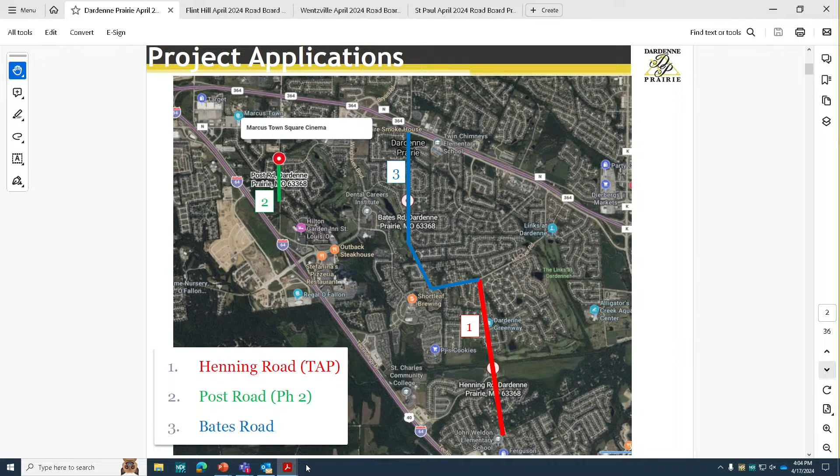So, City of Dardenne Prairie, we've prioritized our projects. Henning Road TAP grant. So obviously you all know this is a new category for the road board to help with pedestrian movement. We worked very closely with Sarah at St. Charles County and Amanda on all projects, but especially on this one. We already have a federal project grant in hand, and we're asking for additional help on the match because there originally was no match on the county road board on this category.

So we're asking for help on part of the match. We're also identified, if we're working on the pedestrian going over the bridge, we've added in to that a bridge resurfacing similar to what MoDOT's been using on their bridge decks, which is a very good process. And this will include the pedestrian path for that.

So some of the features that we have here, reasons why: the existing conditions, there's somewhat of a path there. We're going to need to enhance it, obviously widen it, make consistencies is the goal here. We are going to be using the existing bridge deck itself, so we cannot make that 10 foot. We have to keep the portion going over the bridge deck at 8 foot.

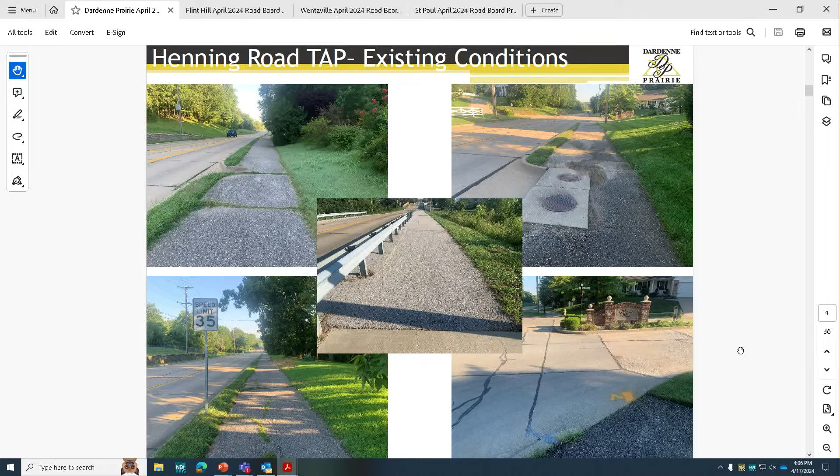So again, we have also included in the federal grant, at the suggestion of Sarah, some of these features. The first one I talked about, the bridge deck and the bike path resurfacing, needs new pavement markings, and also, in addition, high visibility crosswalks, some rapid flashing beacons. And again, the biggest part of it is to get consistency on the trail.

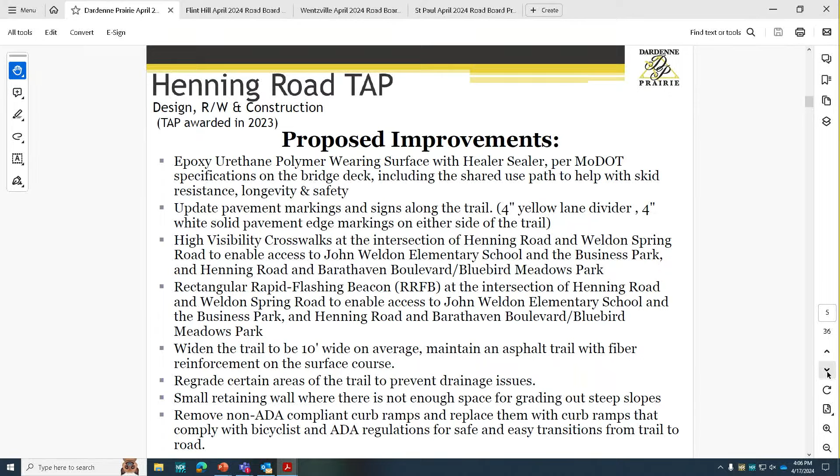We're going to utilize an overlay system to keep costs down. We're not proposing building new concrete or anything. We're going to try to use as much of the existing trail as we possibly can for our efficiencies. There will be a small amount of right-of-way needed up towards the John Weldon School. And a lot of that is to be determined, as you all know, once you get into the design process.

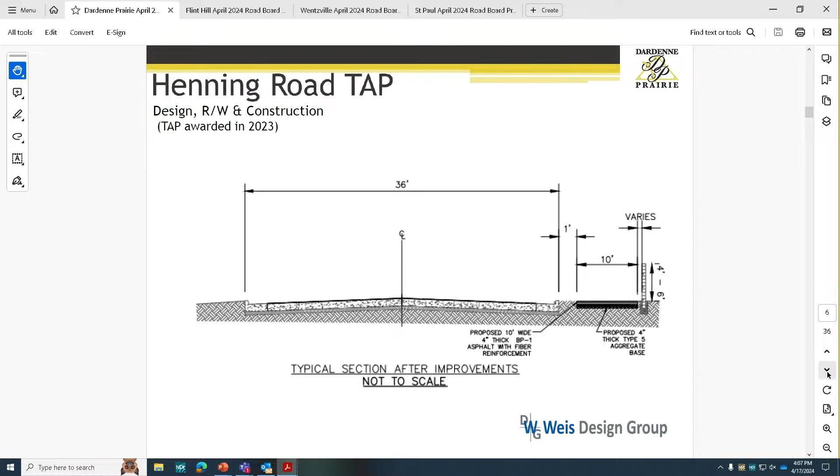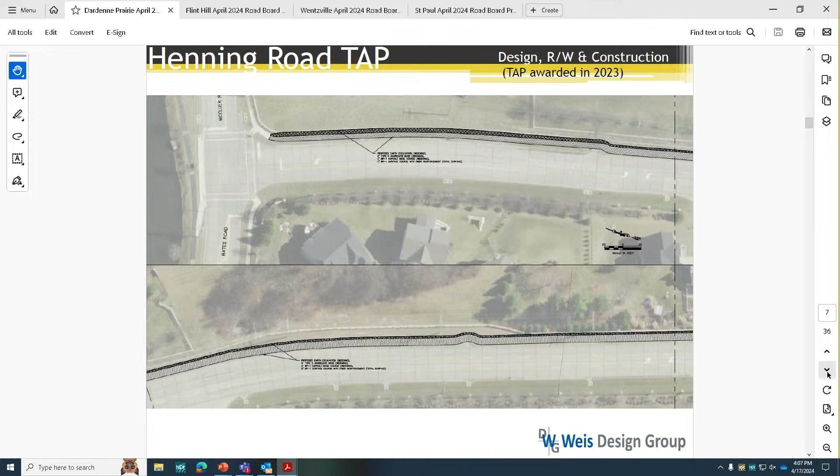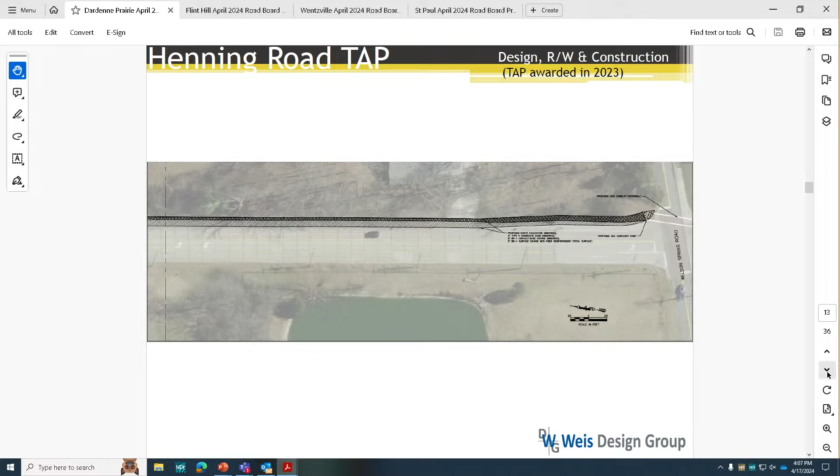And that just shows a kind of typical section. And we can go to, we have prepared the plans. It runs from Bates Road all the way to Weldon Spring. So it's a major thoroughfare for pedestrian movement and connects very importantly to the trail system and to the park there at the Dardenne Creek Greenway area. And again, all the way up. At some point, future improvements to Weldon Spring, but this is the connection on Henning, the TAP grant.

And there's the numbers. Any questions on Henning?

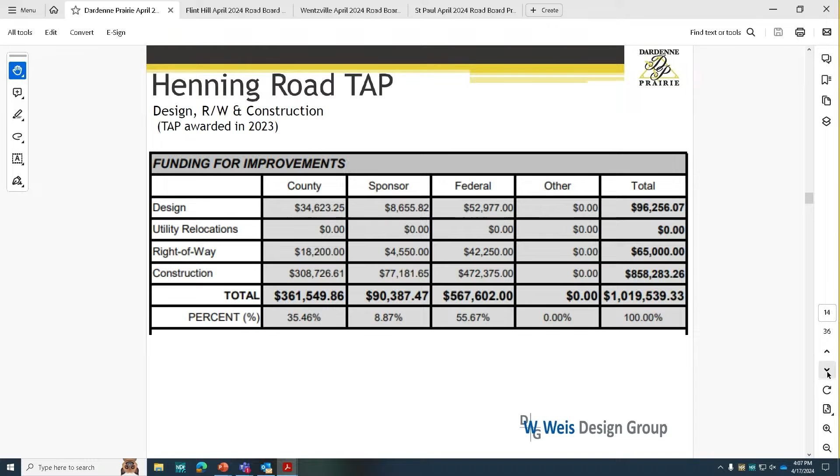I'll move into our second priority, which is a continuation of phase 1. That's getting ready to start the engineering phase.

This is phase 2. Again, in coordination with Amanda and Sarah, we've done some good work looking for opportunities for safety and pedestrian movement. There is, and will continue to be, a trail on the west side.

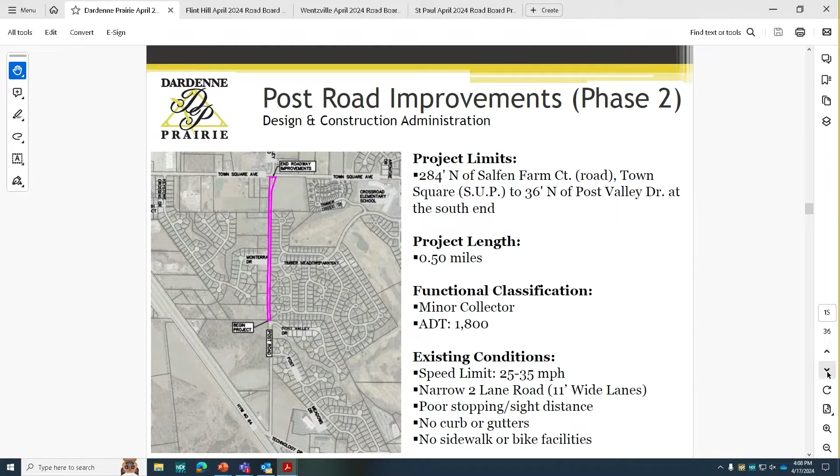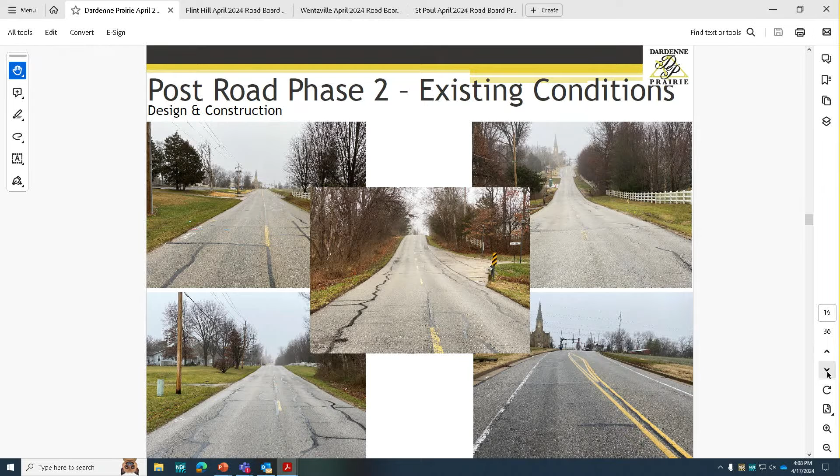Here's the existing conditions: pavement distress, but the big thing is sight distance issues and the pavement itself needing renovation. There's no control on the water, curb and gutter. So phase 2 will continue, extending a small box culvert along and heading up — you can see in the top left there, the church of ICD. It's a very important connection for Dardenne Prairie and the county.

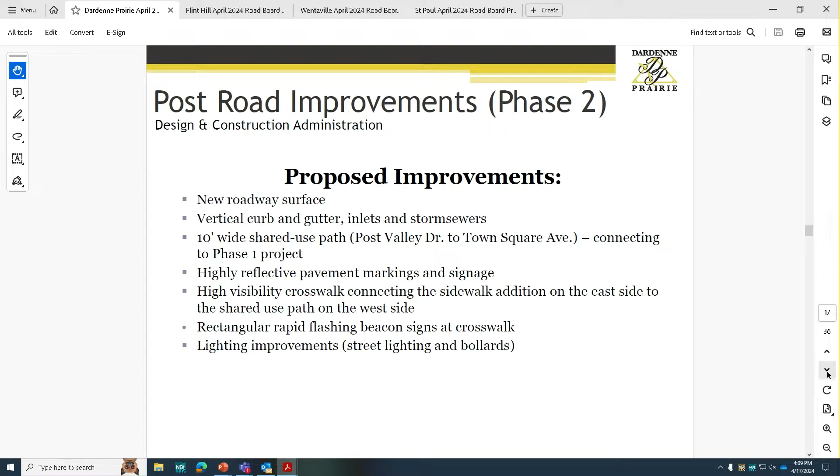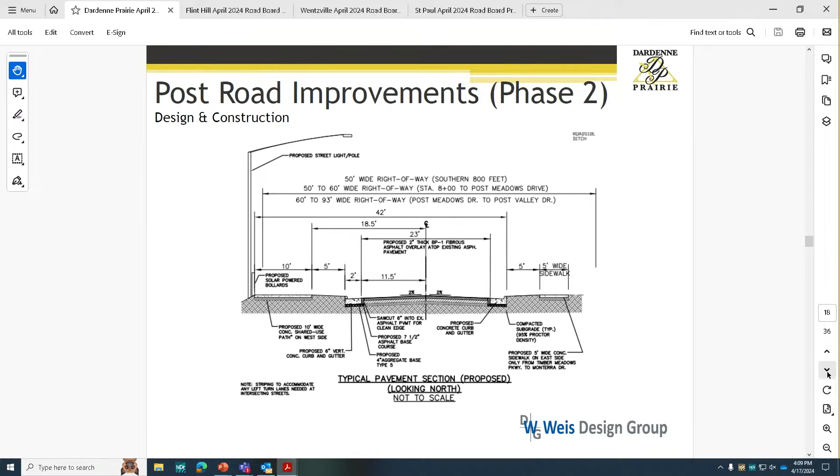Here are some of the improvements: lighting improvements, curb and gutter, a 10-foot wide shared path with new reflective markings, and new roadway surfaces. This typical section was done in coordination with Amanda and Sarah, as I said earlier. We have prepared preliminary drawings.

This will be leaving off from Town Square Avenue up near ICD, and then to the south where we connect to the improvements from phase 1.

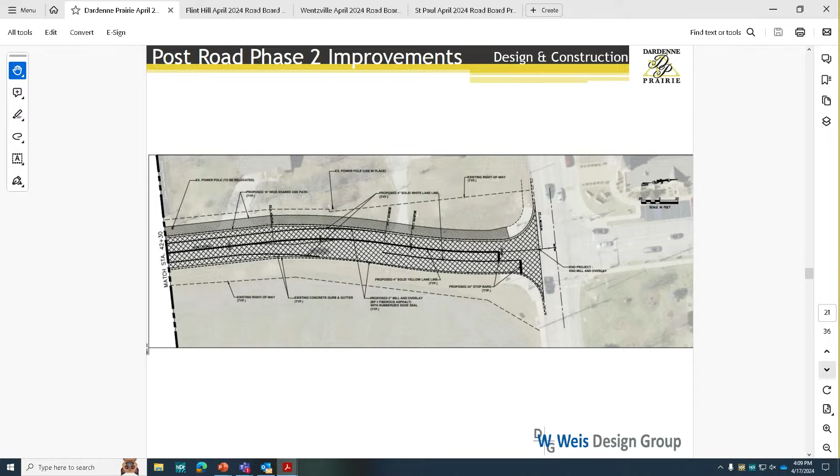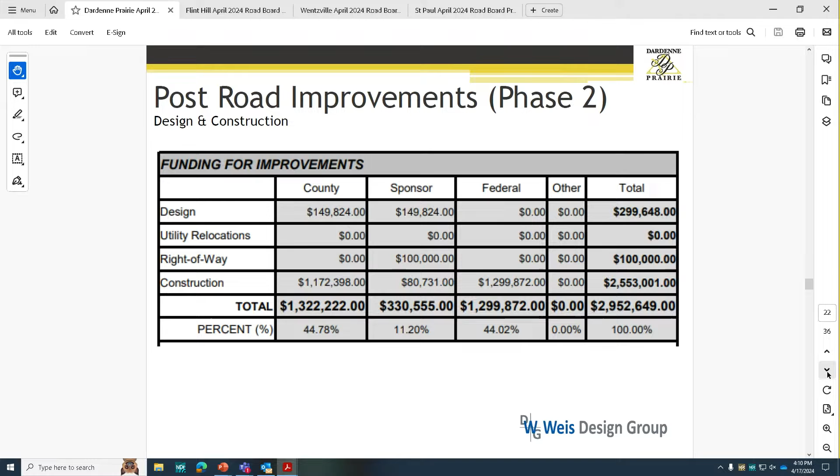We did max out the federal share on Henning as well — Henning, Post Road phase 2 — and you'll see we're doing the same thing on the next project, which is Bates Road. A little bit simpler of a project, mostly a mill overlay and some pedestrian movements, working with staff.

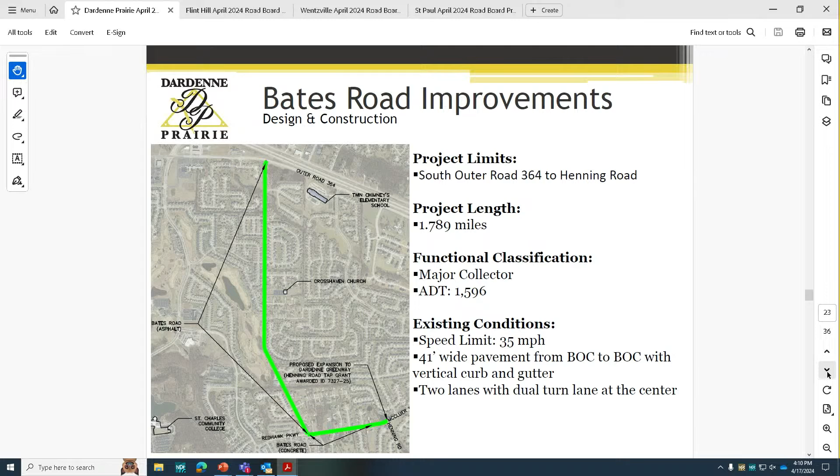We're going to be utilizing some bike lanes because we have width there that isn't really being utilized. By the time we're ready for construction, it's going to be more distressed than it appears now, so there's a couple of different pavement sections on this.

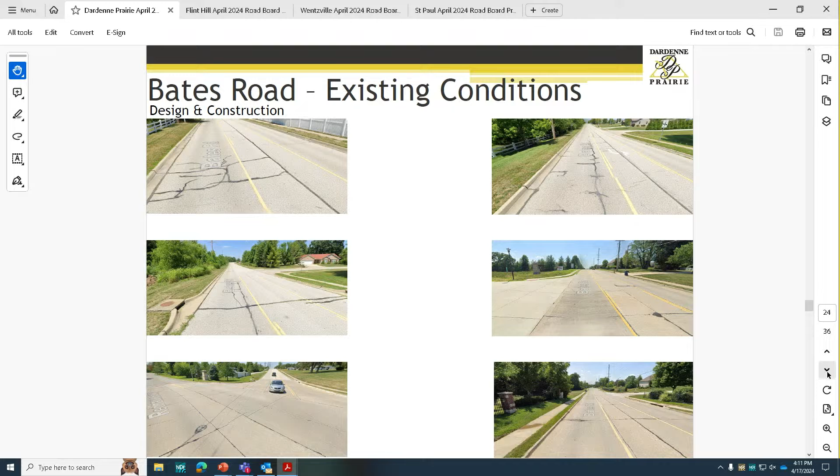There's concrete curb and gutter, which we're only going to do minor replacement on. We're going to mill new surface and provide new bike lanes. On the end connecting into McClure, there'll be a lot of slab replacement that has cracked, and of course pedestrian and bicycle movements.

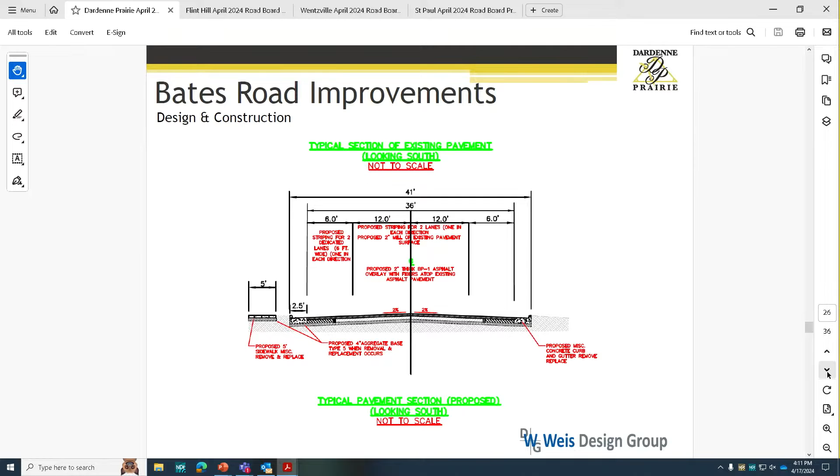High visibility crosswalks — here's a typical section. Again, no right-of-way needed on this project, which is good. We did lay out the bike lanes, though they're a little faint on there.

It's the white line on the edges, both directions, to be a bike lane. Any sewer lids or sidewalk sections that need replacement will be replaced as well, but the dedicated bike lanes will serve as part of the Gateway plan, the pedestrian plan.

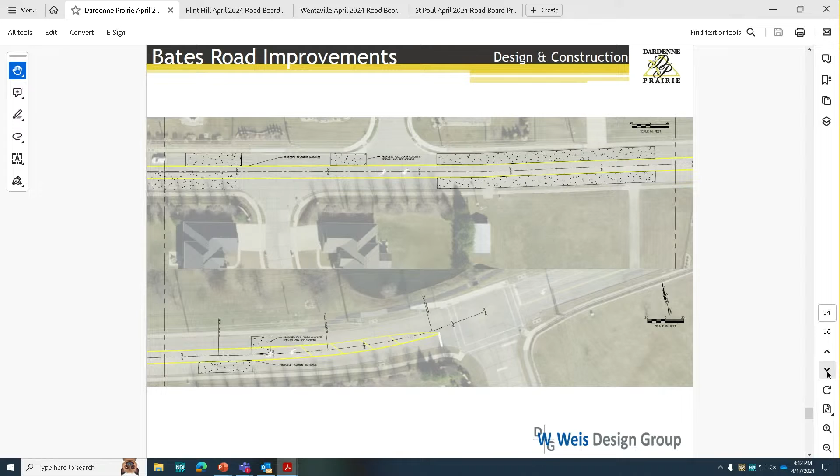You'll see in the concrete section there's quite a bit of slab that has failed. Some people still think that might be McClure, but that's actually part of Bates until you get down to Henning, then it changes to McClure — a little bit of an odd street naming situation. But again, this is to keep this very vital connection viable and up to date; it's more renovation, replacement, and preservation than anything new.

Questions? So the federal funds on all three of these are applied for already?

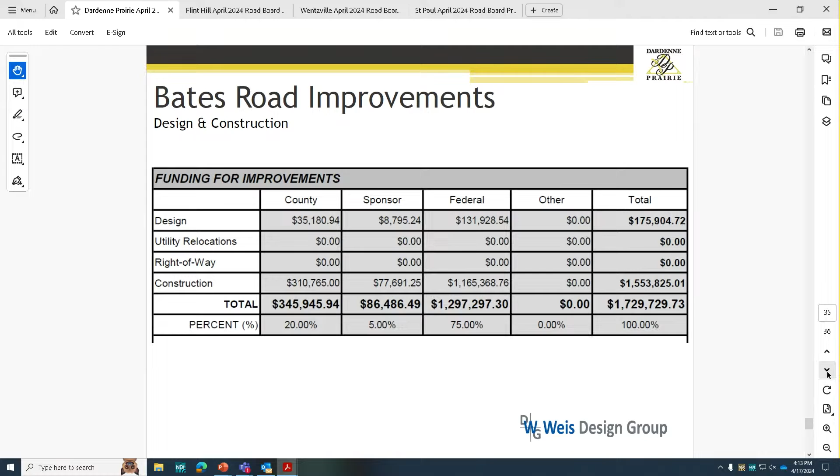Yeah, so Bates Road has been applied for this February, and we maxed out the federal share at close to 1.3 million to gain the maximum points for the cost portion. Same way with Post Road — we applied in March, not February. Henning Road we had already secured last year.

Okay, so this is just asking for the new category that you all created to help share the costs on the TAP grant. Thank you.

Other questions? Very good, thank you. Thank you very much.

Next up is the City of Flint Hill.

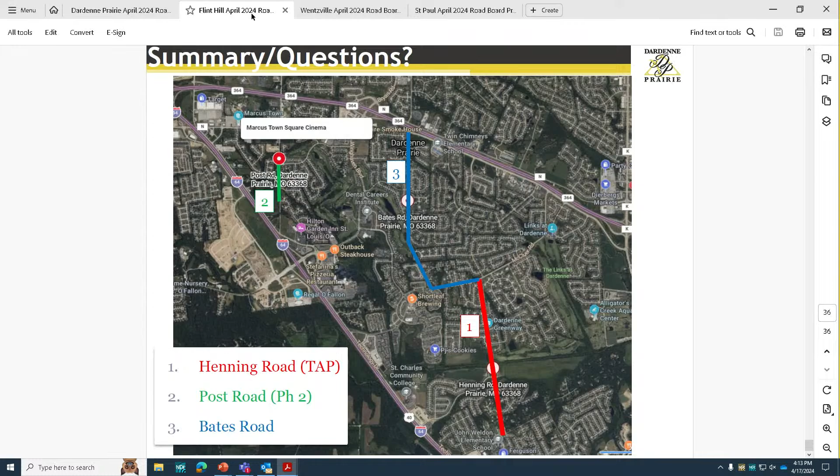I'm still here. Oh — change your shirt or? I do have a hat I can spin around.

So we're also proud to say we represent the City of Flint Hill besides the City of Dardenne Prairie. I didn't say my name — I have Tom Weis with Weis Design Group, and Lindsay Weis Smith, she's our president of our company. City of Flint Hill.

This is more of an intersection improvement only. We did not ask for federal funds because it's a smaller project. However, this kind of just came to light through the city.

There are two representatives from the City of Flint Hill here, the city administrator and one of the aldermen, sitting right back here — Dennis and Chris. So what we have here is a safety issue. Highway P connects to Mexico right there, and it's very narrow. And you want to go to the next slide?

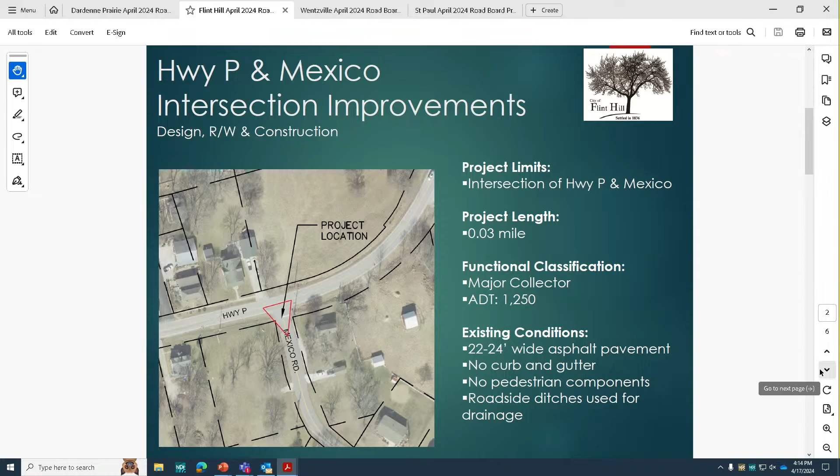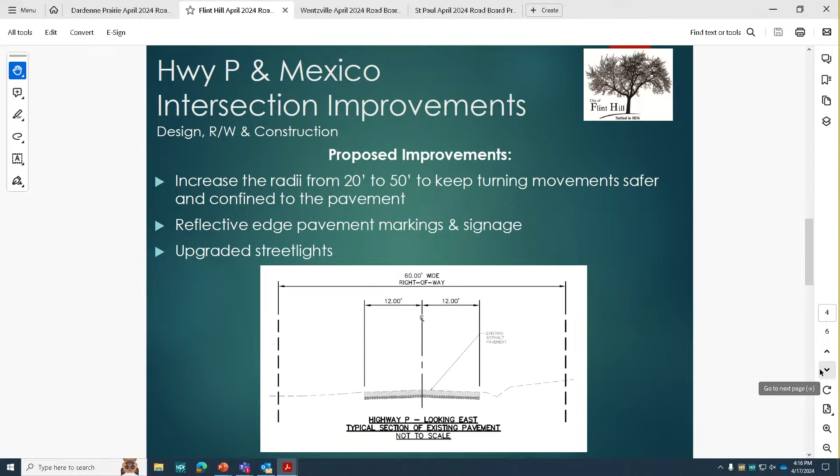Also, larger vehicles coming out of Mexico onto P. So again, radius widening, and you'll see in a minute our rough conceptual sketch of what it could and should be. We do have the support of MoDOT. They have sent us a letter that's been turned in. Again, we're just turning this in to you all directly, and you'll see why further in a minute. Again, increase the radiuses from 20-foot radiuses to 50-foot radiuses and repave the certain area and add some lighting.

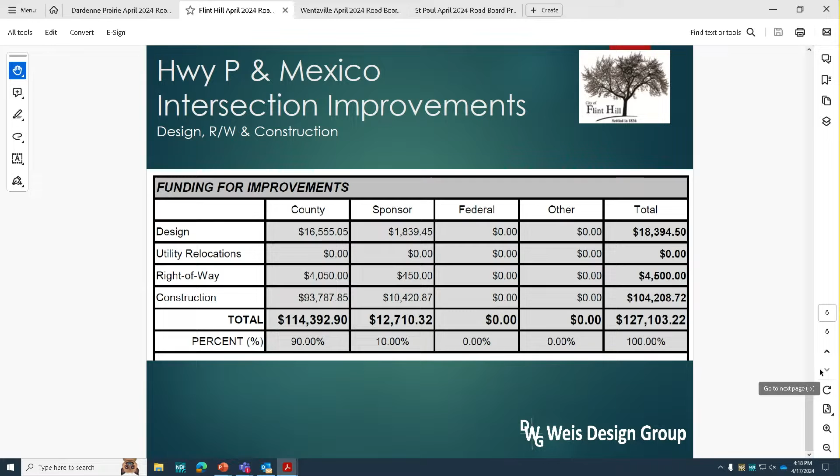Questions? You said one side, which side? If you could go back to that drawing - we're just proposing to improve the side of the T. In other words, we're not going across and making major improvements to P. We're just focusing on the entrance and exit onto Mexico Road. Got it, thank you.

You want to do Wentzville while you're up here, or you want to? Well, I don't want to. No contract probably, okay, well I don't want to step on anybody's toes. Thank you very much. Thank you. City of Wentzville?

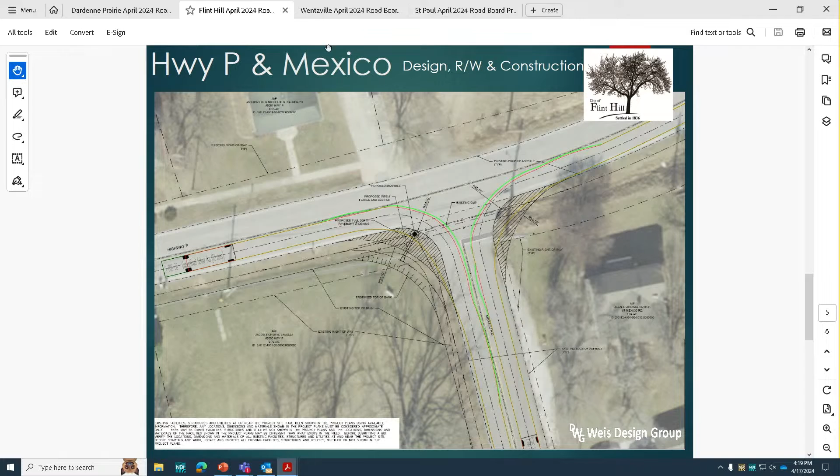Yeah, if he's gonna get all of the grants, he can stop. I'll make sure I'm doing this right. Yeah, down here. And this and that. Or I can use the other. It's like magic. All right. Nice. Excellent. Well, thank you very much.

Well, I'm getting the royal treatment, so I appreciate that. Well, my name is Matt Wahlberg. I'm from the city of Wentzville.

We have two applications here, two very different applications. Our first one here is really a pavement maintenance project for Wentzville Parkway and West Meyer Road. These are both 5-lane concrete streets. Some of that pavement has been there for 30 years. It's been added on to and certainly driven on a lot, and it is deteriorating quite a bit.

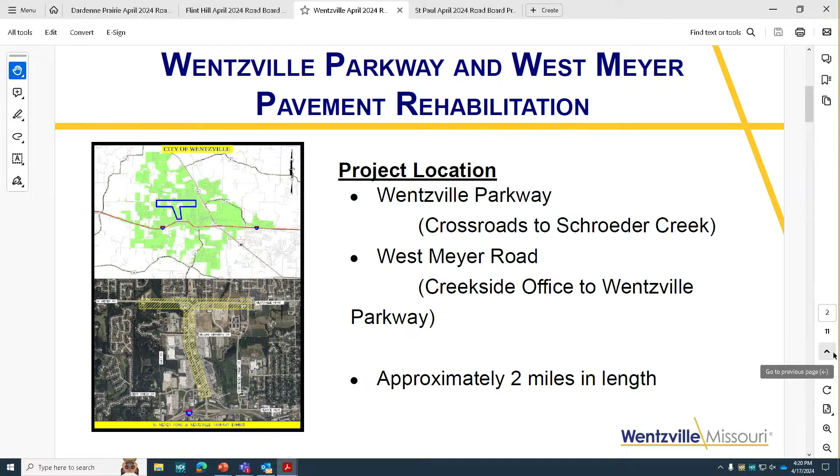In all, the project limits are about 2 miles. It really stretches from just north of Highway 70 up to really close to the Wentzville City Hall, and then just the adjacent part of West Meyer.

As I mentioned, the pavement is getting old. Just all the private work and public work along the sides to bring it from its original state to the 5-lane cross-section, and then just the thousands of cars a day really just taking its toll. It's gotten to be a pretty rough ride, and our public works crews are just - the asphalt patching is nonstop.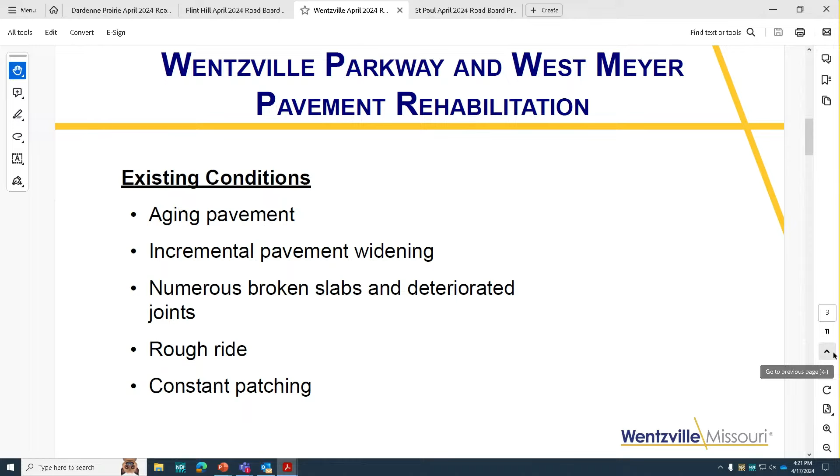And it really is a terrible place to do any sort of patching work. So we're looking at no longer temporary fixes. I think we've gotten our life out of those, or maybe we've gone past the life of those, and now we're looking at actual slab replacement.

So pictures don't do a whole lot of justice, but we have these broken slabs where the longitudinal crack just keeps on going, and sometimes it's not really a matter of where you start doing work, it's where can you actually stop. This is pretty pervasive, especially in that southern part of Wentzville Parkway, and then the joints.

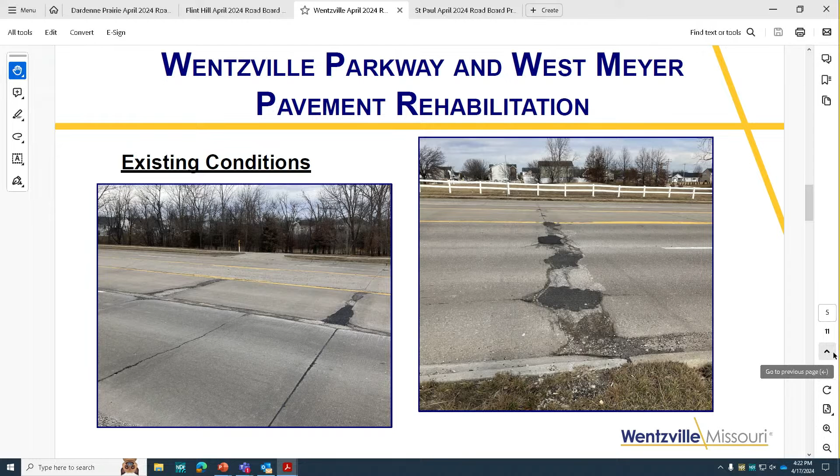You can see the multiple layers of patching. We're patching on patches. There's not much more we can do, but what all this adds up to is that we're looking at a slab replacement of about 15% of the street, and that is quite a bit. On top of that slab replacement, another 250 or so joints to be replaced.

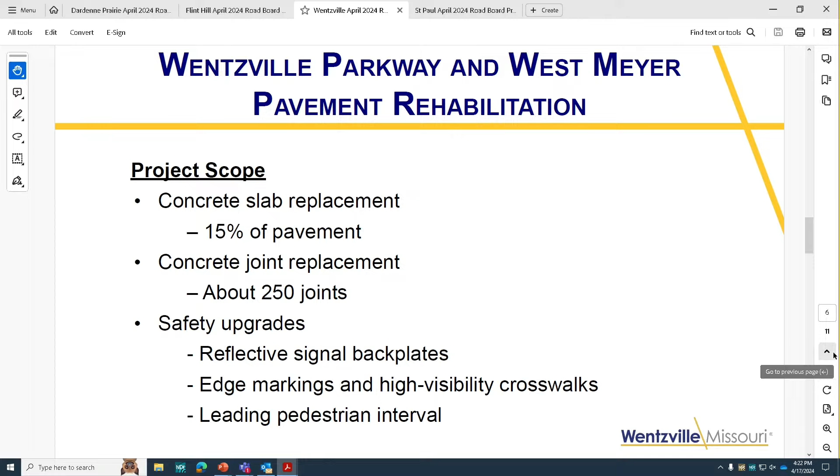At the request of the county, St. Charles County was looking at this section of Wentzville Parkway for some signal safety upgrades. They're looking at an SCP application for that this round, and we've incorporated that work into our application, so it's in our STP application as well.

So we have asked for just shy of 50% from the federal government for this project. We're asking to split that other half with the county, more or less a 30-20 split.

I think that's it for me for Wentzville Parkway. Do you have any questions on that? Of the two projects, that's the less exciting one.

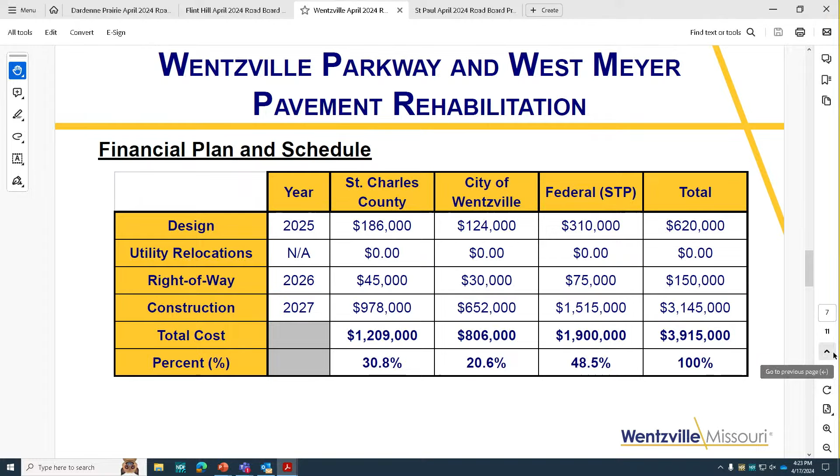Well, I guess from a maintenance standpoint, we think Fed funds are exciting. Well, I would love to get it. That is one of those projects that is kind of boring, but if you're not out there patching, our public works crews would absolutely love this, and the drivers too, once it's actually smooth.

So yeah, and this is by far the bigger application here. Instead of maintaining a roadway that's been there for a while, we're looking at finishing off the first half of David Hoekel Parkway, building that brand new road, about 3 miles of it, stretching from West Meyer Road up to intersect at Piney Road.

This project has evolved a little bit over the past year. That might be an understatement, but a year ago there was a county project and a city project. After working with the county, those two became one project as Phase 3, and the city's managing that. The county is already helping to fund the design and right-of-way phases, so this application is only for the construction phase.

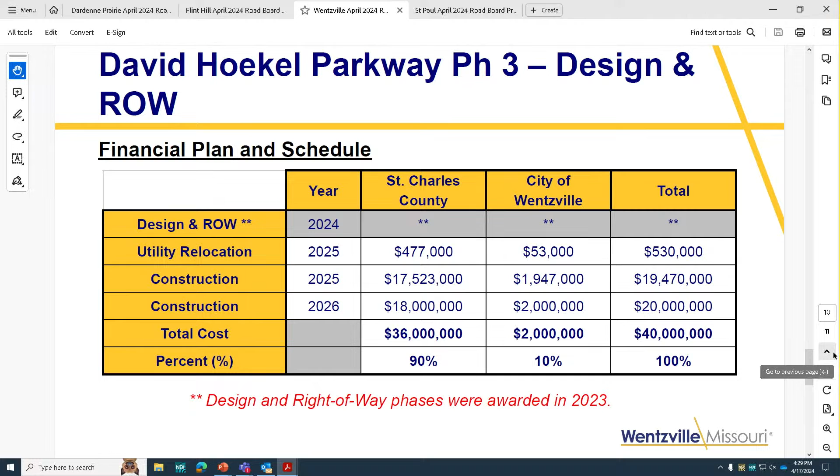The environmental assessment had the alignment for that to go up through several of the properties to the north. If we can have less impact on those properties if we more or less go straight, that might end up being, instead of a culvert, a bridge. I think that's where you start getting those contingency factors that are pretty significant.

So if this creek crossing becomes a bridge, then it's just a much different cost than trying to put a culvert through there. But there's a lot of floodplain and floodway considerations to try to manage there. And with it being a pretty rapid schedule, we're trying to make sure we have what we need in place to meet that construction timeline of trying to have it open in 2.5 years.

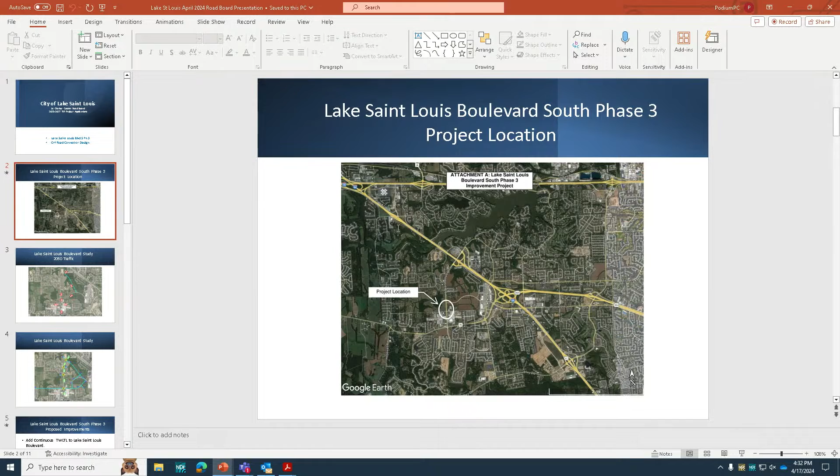Hi, my name is Terry Rigdon with the City of Lake St. Louis. I'm Public Works Director. Thank you, Board, for seeing us today and hearing about our applications, giving us an opportunity to present.

My first slide's wrong. Orf Road Design is not on this project for this year, so we'll skip that one. We're asking for a grant for Lake St. Louis Boulevard Phase 3 on the south side.

Here's the project location. It's on Lake St. Louis Boulevard, obviously, down the main area, but Hawk Ridge Trail here goes over to Shoppes at Hawk Ridge, and here's Highway N. Here's the equestrian center the county just purchased, and so we're stopping right with the equestrian center about halfway through.

We're thinking this section here is going to be part of the Highway N improvements. We don't know exactly what that's going to look like, so that's why we pulled up short a little bit here, and we'll have this little piece to blend into the future Highway N project whenever we get some preliminary plans, which I believe is supposed to be next year, within the next year.

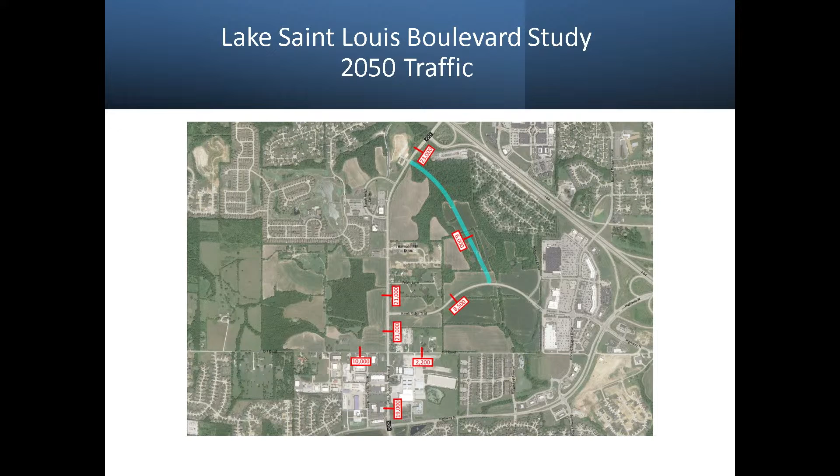Give me one second, sir. Just something for this, the previous is being shown at the presentation. They're not getting Lake St. Louis online. Just like soccer, I get my time back at the end of the game. You want a yellow card or a red card?

That concludes my presentation.

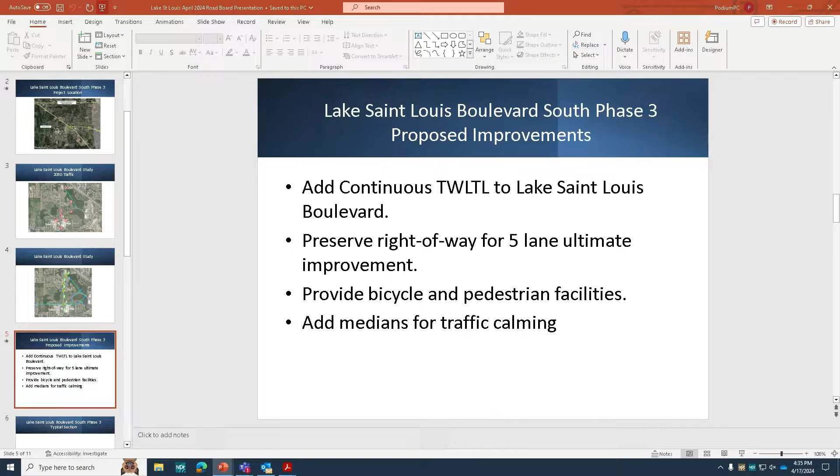See this. Okay, you're good.

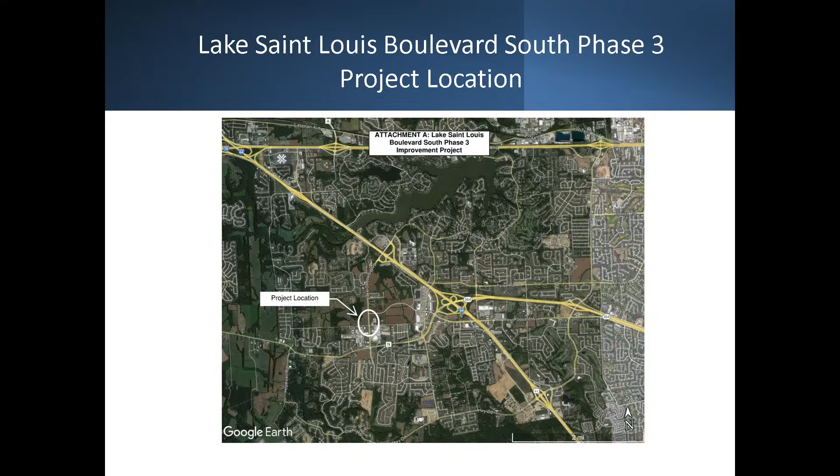Part of the traffic study was signal locations, future signal locations. We had done a study years ago. This is where we think the new Hawk Ridge Trail will realign with the Fremont here, which is on a previous phase, and the signal will go in there. The next signal will be here, and this is, we're thinking Orf Road will actually come up and tie into here. We've got a design that we're working on, but we got a grant from you guys for that also. So this will be the next signalized intersection, which may be ready for a signal by the time this project even goes into construction, so we may be able to piggyback it on it.

So, while I've got this slide open, you guys are aware I think there's 1,200 homes going in down here, and total I think there's about 2,000 homes coming in on that old N corridor there. So there's going to be a lot more traffic that's going to come up Lake St. Louis Boulevard from N to the highway.

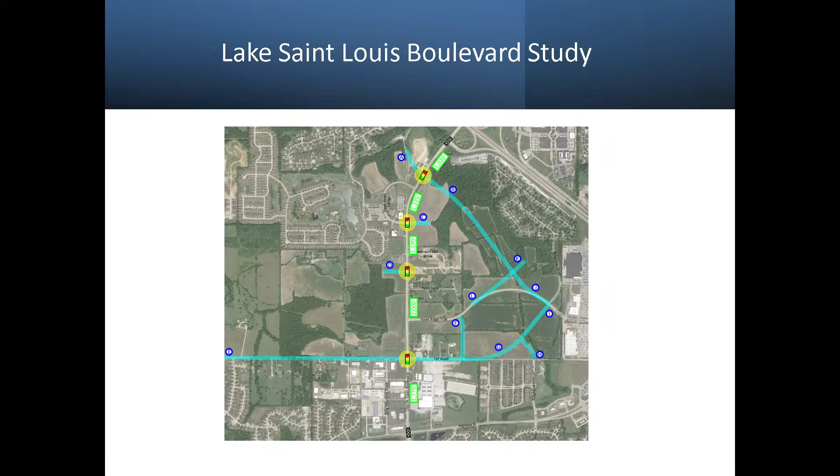The project consists of this, at this phase, is putting in 3 lanes: a center left turn lane and 2 full lanes, curb and gutter, and storm sewers. We're buying the right-of-way or having it dedicated for the full 5-lane ultimate improvement, which is recommended for the 2045 traffic ADTs. We're adding bicycle and pedestrian facilities on both sides, and some medians for traffic calming along the center to try to keep the speeds down.

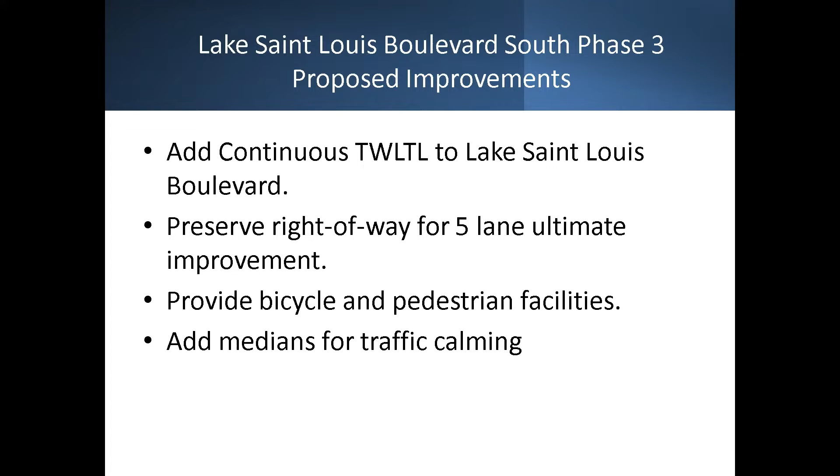Buying the right-of-way we think is important right now. We'll just add 2 lanes onto one side of the road, you'll see that on the cross section. So we'll build this piece now, this piece will come in the future. The sidewalk will actually be placed where it will be in the future, and then we'll preserve this corridor, so nothing gets put in there that we have to rip out of the right of way. Plus it gives an expectation on the development on where they're gonna be, where their limits are. It's a 6-foot sidewalk on one side, 14 and 12 foot on the other per county recommendation. There was one spot we were moving it to 10 to accommodate what's there.

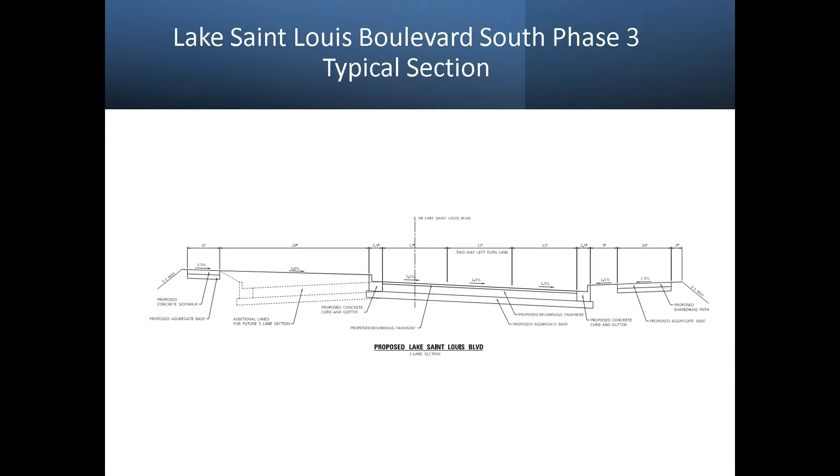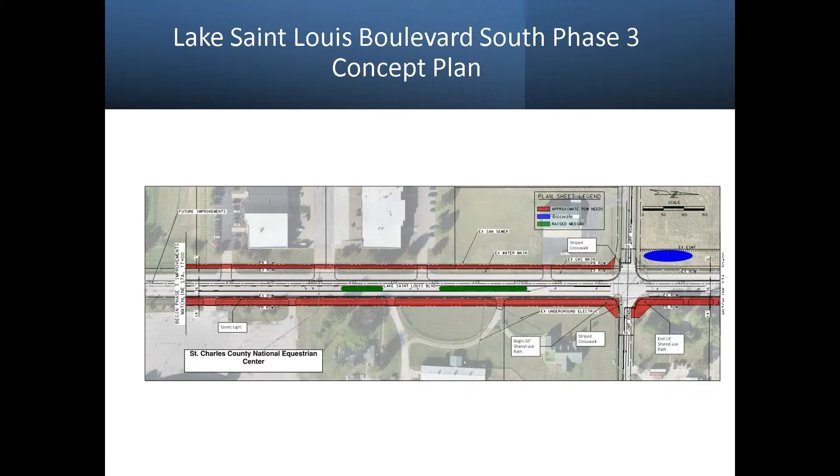Here's the aerial, Hawk Ridge Trail taken off. Like I said, there's medians, these are penciled in. There's a new trailhead here, hooked into the 14-foot sidewalk that's gonna be on this side. Our shared use path is 6 foot on the west side. It continues down Orf Road, set up for traffic signals, so it'll be designed for traffic signals and won't have to be replaced when the signals come in, just install the signals. And then we cut, like I said, we pulled up short right here, and Highway N ends right here. So we wanted to have a transition space depending on how that preliminary design comes in for Highway N.

We asked for 80% from the feds, so we applied for 2.8 million. We're asking for 565 from the county road board. Total project cost estimate is 3.5 million. The city's match is 140K.

This is following the actual East-West Gateway schedule, probably the federal schedule. So 25 preliminary engineering, 26-27 right of way. I'm thinking that's probably what we applied for in the grant, where they were letting us move everything up. We just don't want to run out of time with the reasonable progress that they're having, so potentially we could move this up a year.

Here's just an overlay of some of the details, in case you have questions. Orf Road, here with the future connector. So you'll have the traffic coming down here, the trail will come up to here, the existing one. We'll have the new connection come over to Fremont up here at a traffic signal.

That's the presentation. Questions? Very good, thank you.

City of St. Charles?

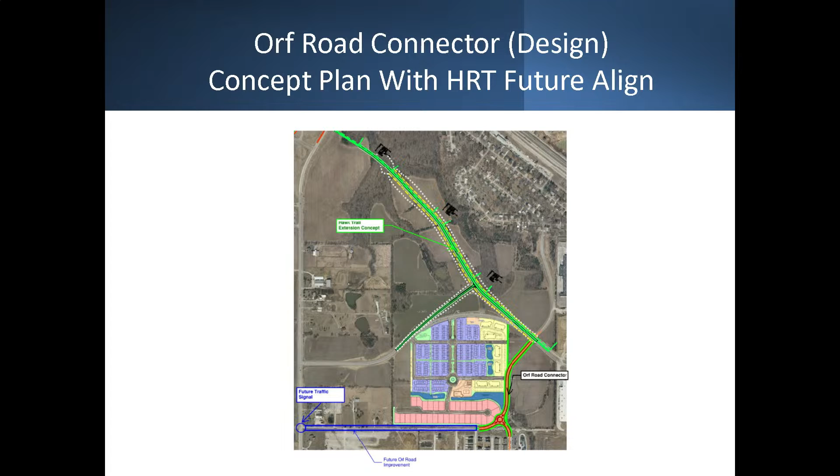You know I need help. You know I need help. Oh, no. Here, sorry.

Thank you to the board for allowing us to do our presentation today. I'm Jim Gillum with the City of St. Charles, assistant city engineer. I've been with the city for about 1.5 years, and I've been a resident here for about 20 years.

On April 2nd, the voters passed a bond issue so that the city could build a city center complex at the old American Car and Foundry site. One of our projects is going to go right through the middle of that project, the Main Street extension, project number 1. We've got $2.5 million of grant funding for that already, and $300,000 from the County Road Board.

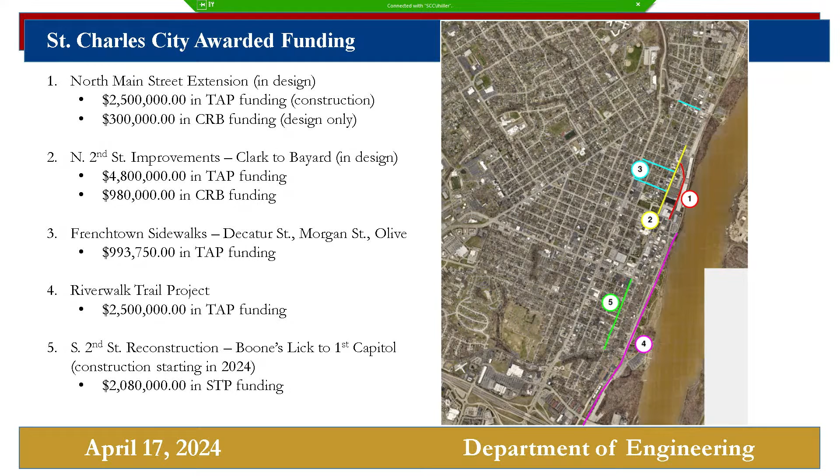We've also got a couple other projects in the vicinity. The North 2nd Street project from Clark to Bayard, about $6 million. We're doing the Frenchtown sidewalks on Olive, Decatur, and Morgan for about another $1 million. We're spending about $2.5 million for the Katy Trail improvements, paving that from the Foundry down to 70. And then we're also doing the South 2nd Street project from Boone's Lick to First Capitol. So we've got about $100 million of development that we're going to be doing within the city, in very close proximity to downtown.

As we stretch out a little bit, we wanted to show what we've done in the past 5 years or so. All of the projects in blue are projects that we have built. The projects in green are currently in design. The projects in red are projects that we have submitted applications for to the board. And the projects in orange are projects that we've submitted applications to East-West Gateway for grants. And then we also show the ACF City Center Complex up in pink.

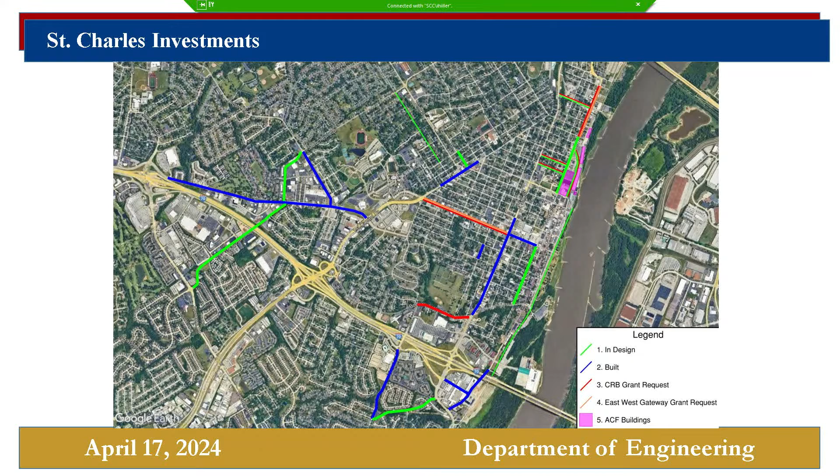Just real quick, we'd like to take credit for all the projects that we're doing, but the reality is, many years ago, people smarter than us put together a plan, and we just get to put it in motion. So most of the projects come out of the Frenchtown Great Streets report, and then the First Capitol project comes out of the Sustainable Gateways to the Heart of St. Charles report. And they all touch on the bike plan from the city and the county.

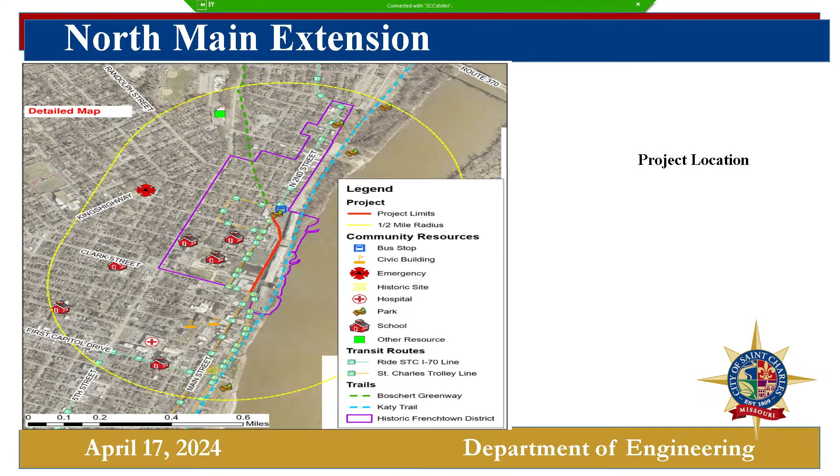Our first project is the North Main Street extension. It goes from Clark Street up to Montgomery. We're putting in a new roadway, curbs and gutters. We're going to have sidewalks on both sides, parking, enhanced lighting, and buffers between the sidewalk and the street.

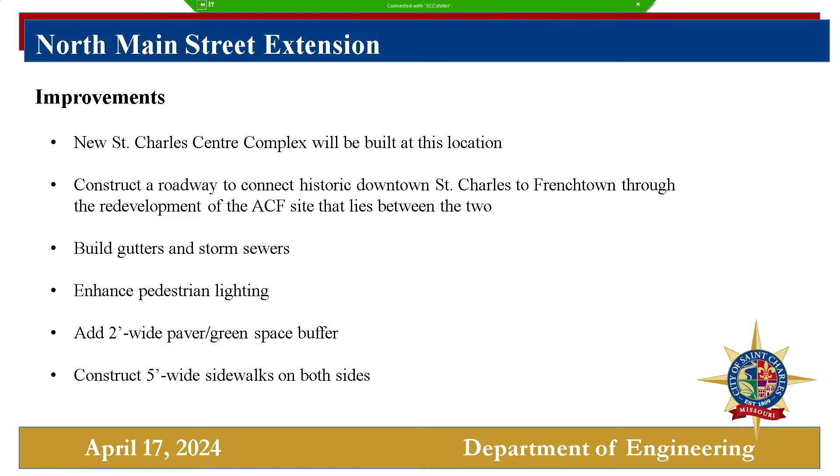The financial ask of the board is $2.4 million. The city's going to be contributing $3.3 million, and we've already gotten $2.5 million in funds from the federal government for bicycle and pedestrian. So the split will be approximately 30% county, 40% city, and 30% federal.

Is the county's $300,000 design already in? We funded that already. It is, yes.

Any other questions on this project? When will the city take ownership of that? We're in negotiations right now for the purchase of the property. So, and I'm just the assistant city engineer, they don't ask me about those things. But the timeline is pretty tight, so hopefully it's pretty darn quick. We already have a consultant on board that's doing design. They're doing it for the Main Street extension and the Second Street from Clark to Bayard already. So hopefully we'll get pretty good looking roads between both of those two projects.

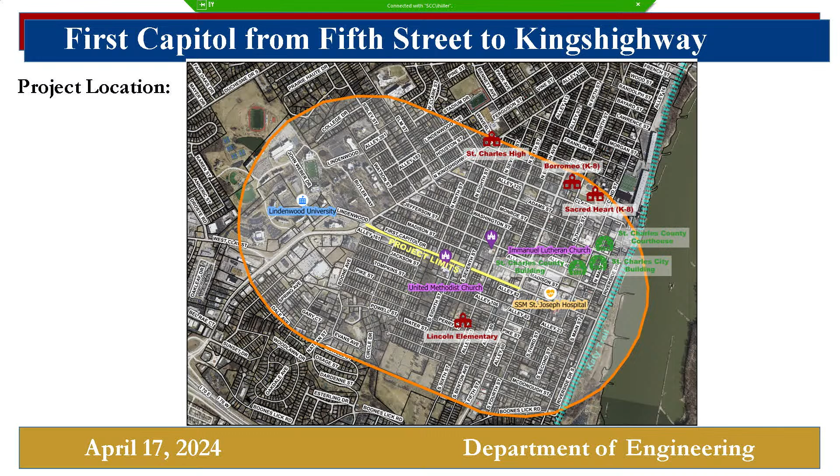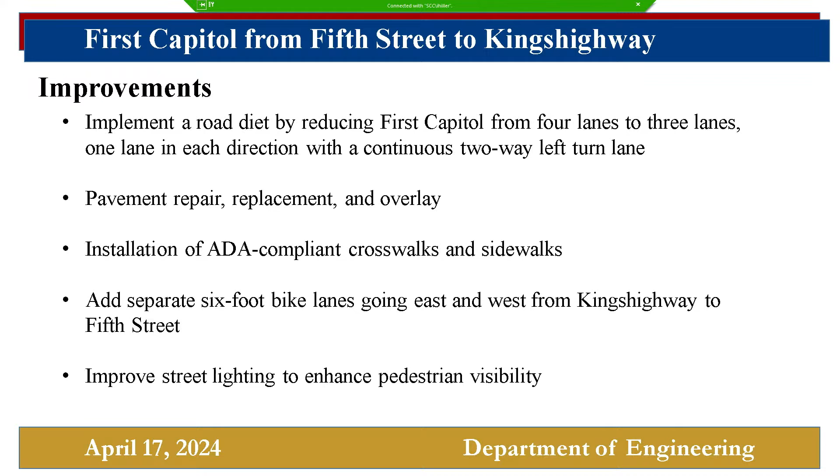The next project we've got is the First Capitol from 5th Street to Kingshighway. The improvements that we're going to do with this one is a road diet to reduce it from 4 lanes to 3 lanes, with a continuous left-hand turn lane all the way down there. The interesting thing is the capacity of the 3-lane configuration is almost as much as the 4-lane configuration. This will allow us to have bike lanes on each side so that we can get people from Lindenwood on the west end down to downtown on the east end. It's going to include new street lighting, ADA compliant sidewalks, crosswalks, and everything. We'll be doing a lot of repairs to the concrete streets, repairing the joints, and then have an overlay at the end.

The financial ask on this for the county is an 80-20 split, $5.2 million from the county with $1.3 million from the city, for a total of $6.6 million. We did put in an application with East-West Gateway for this project as well. If we're able to secure that, then the ask for the county would just be a little bit over $1 million.

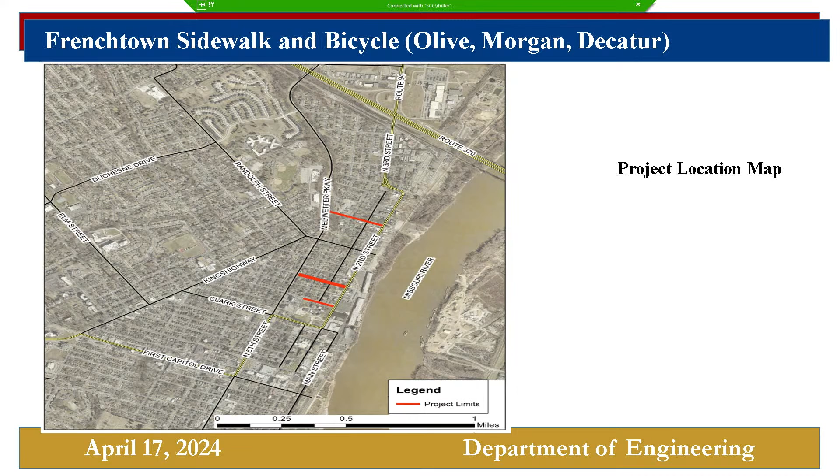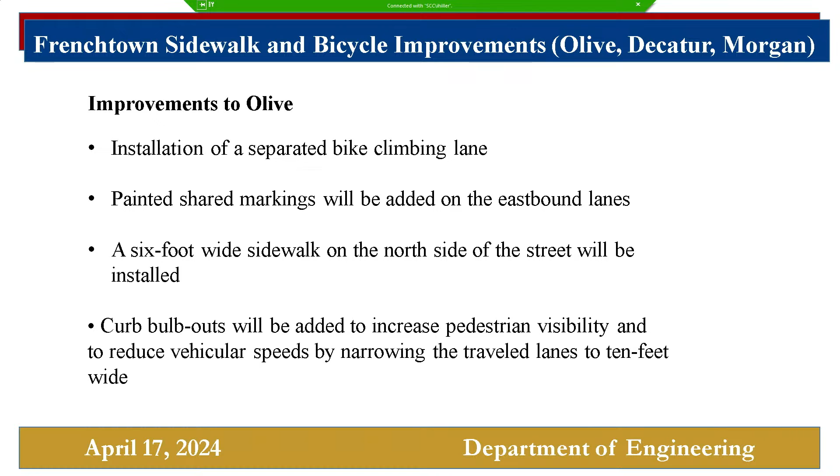All right, next one. This is the Frenchtown sidewalk improvements on Olive, Morgan, and Decatur. This is basically replacing sidewalks, ramps, adding high visibility crosswalks. There'll be a couple bulb outs to reduce speeds and improve pedestrian visibility. On Olive, it's a little steeper, so there's going to be a climbing lane going up to the Boschert Trail, but otherwise it'll be pretty similar to the other streets.

The city's already gotten federal funds for this of $800,000. So the financial ask for this for the board is $222,000 for construction, and the city of St. Charles putting in $55,000. So it's an 80 and 20 split.

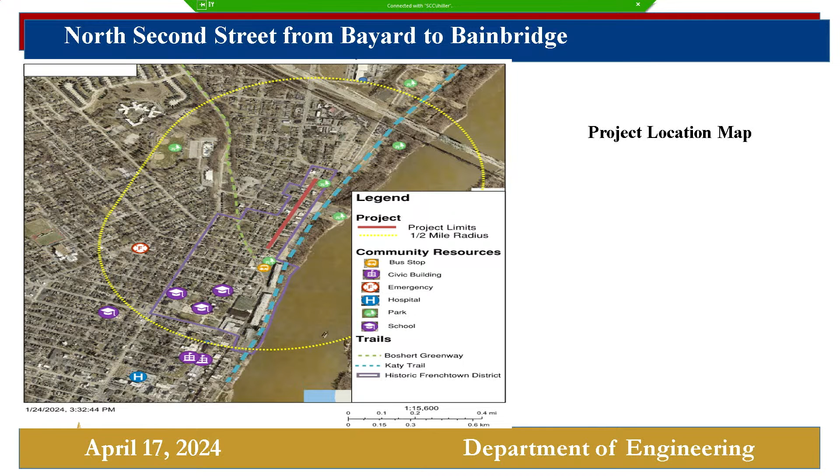All right, and we are moving on. The next project is North 2nd Street from Bayard to Bainbridge. This is from the Frenchtown Great Streets plan, and this is a continuation of the project that's currently in design from Clark Street to Bayard. This will be traffic calming, reducing lanes from 12-foot wide to 10.5-foot wide. There'll be sidewalks and parking on both sides, curb extensions, pedestrian and bicycle features, connections to both the Katy Trail and the Boschert Trail, and we're going to be reducing the speed limit from 30 to 25.

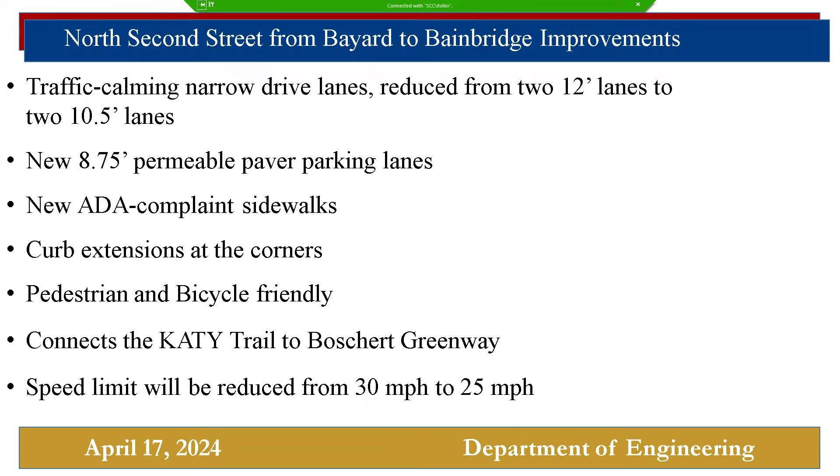The financial ask on this is another 80-20 split, $6 million from the board with $1.5 million from the city, but we did make application to this with East-West Gateway. If we were successful on that application, then the ask for the county would be $1.2 million.

Ballpark, what was the Clark to Bayard? Was that about an $8.5 million project? Yes.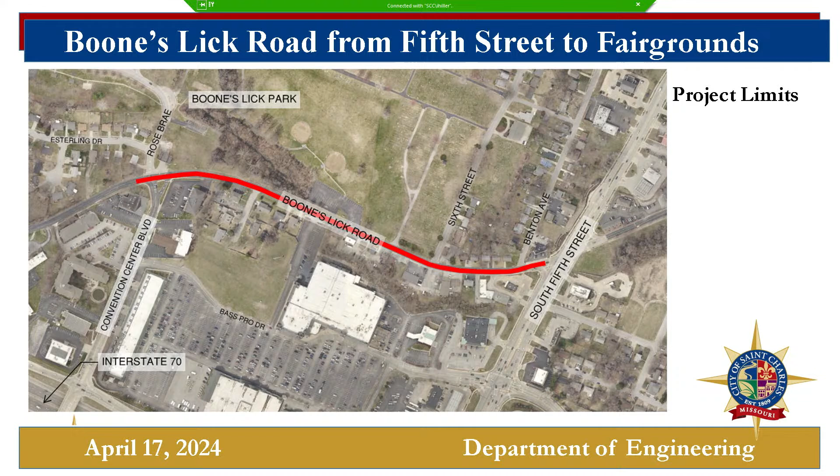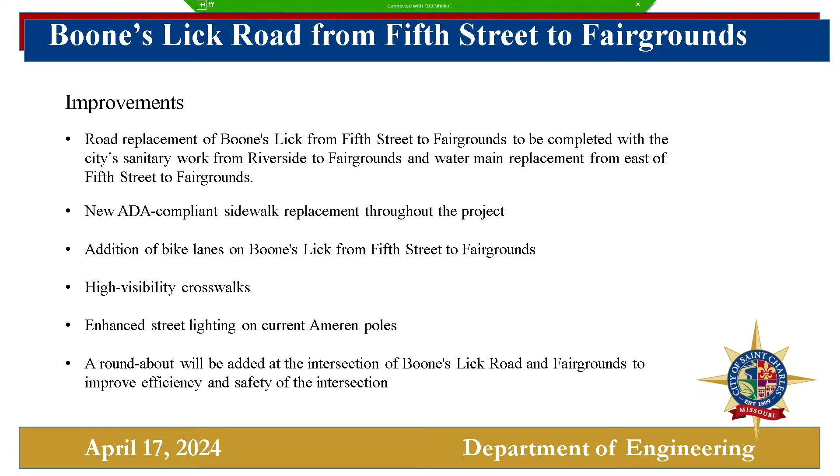All right, we are moving on. The next one is Boone's Lick Road from 5th Street to Fairgrounds. This is another project where there's going to be traffic calming, where the lanes in the roads are going to be reduced from 13 to 14 feet down to 10.5 feet. There's going to be bike lanes on both sides of the road. There's going to be new sidewalks, new ramps, high visibility crosswalks. We're going to put lights on each of the Ameren poles that are out there so that we can light the street up. And then we're going to add a roundabout at Boone's Lick Road and Fairgrounds.

Here's a conceptual drawing of that. This is pretty much the way I go to work every day, and I just come across Fairgrounds, take a ride. I've got the yield there, but traffic on there is pretty intermittent all the time. Everyone has to stop. If you've got a roundabout, pretty much everyone's going to slow down a little bit, and then they're going to get right through the intersection. It's going to really speed up the efficiency. There's another roundabout north of here, and then there's another west of here, and another one south of here.

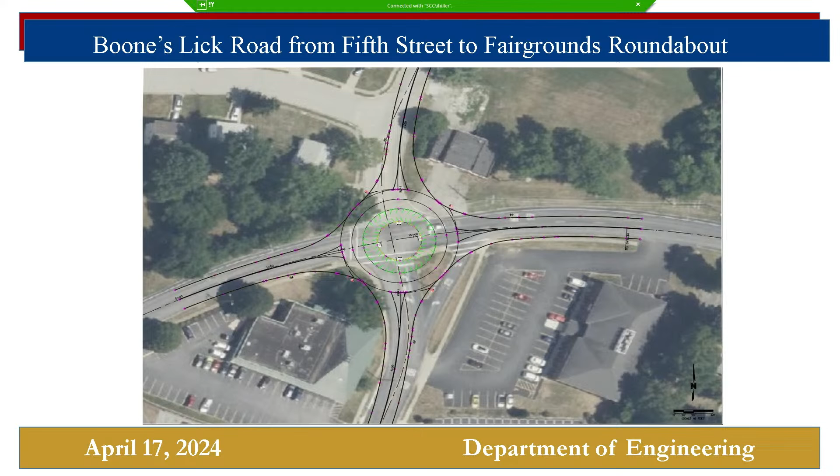The financial ask on this for the county is $3.2 million. It's an 80-20 split with $800,000 from the city. We will be doing sanitary and water work at the same time. We'll be paying for all of those improvements through our capital improvement program.

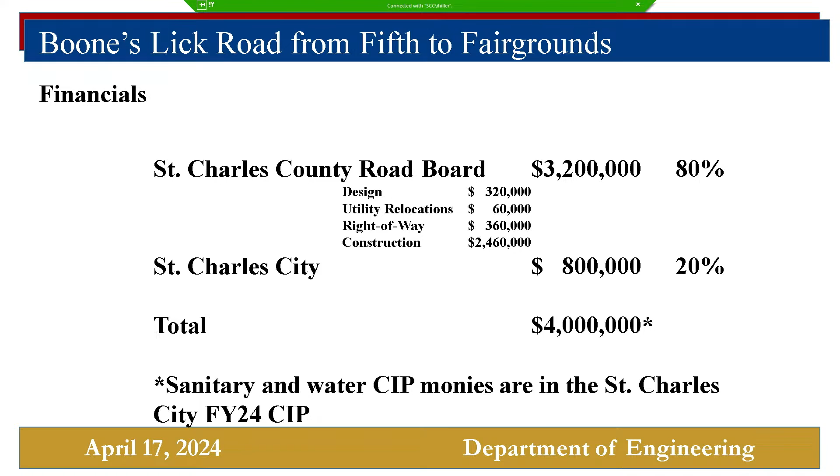All right, and we are moving on. Last project. This is the Truman floodproofing project. It's a stormwater project, and this is the county road board. I understand it may not fit, but some time ago there was a project to raise Truman Boulevard to prevent flooding of the properties to the west. For whatever reason, that didn't come to fruition.

So what we're looking at, between the two bubbles there, is Sandfort Creek. What we're looking at is on the bottom one. Right now, there's a minor creek that flows into Sandfort Creek there. We want to build up the levee there, regrade it so that it flows to the west and then up to the north. And then on the top bubble, we would install a culvert and a pump station. Whenever the Mississippi is down, the culvert would have gates open at the end of the pump station. It's kind of a culvert pump station combination.

And if there's a rain event, stormwater just goes right through the culvert. If the river is up, then the gates will close, and then stormwater will go into the forebay of the pump station, and they'll get pumped over the levee. This is less expensive than the road project, and it ends up protecting an additional 100 acres.

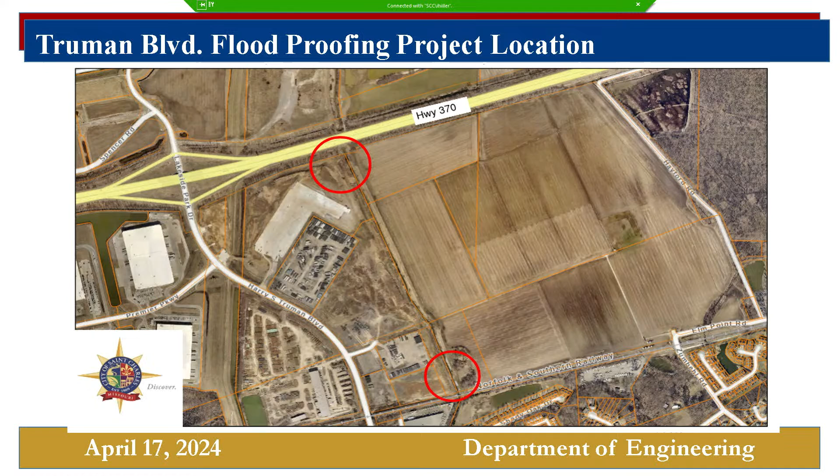So St. Peter's didn't do a flood mitigation up on Truman? I thought they had talked about a pump and all that, but it was kind of interesting whether it would work or not, and they kind of even talked about not coming back for future funding if that experiment didn't work. But I think that was the city of St. Peters, wasn't it? Yeah, I think St. Charles and St. Peters had tried to work the road project before, and for whatever reason, it just didn't work out.

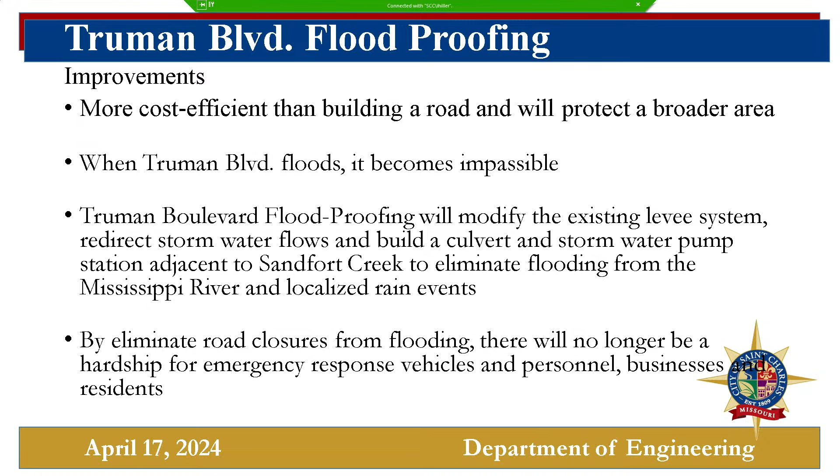So the financial ask on this is $3.2 million, with the city contributing $800,000, so it's about a 74-26 split. Does anybody have any questions on this one?

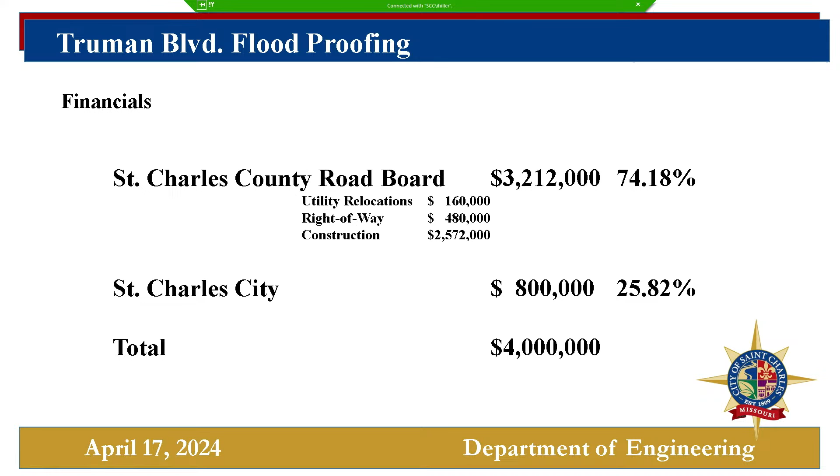Thank you, members of the board, for allowing us to submit. My name's John Choinka, Choinka Municipal Services. I'm here with Mayor Bauer, he's the mayor of City of St. Paul. What we're proposing today, and I apologize, we don't have a PowerPoint. Last time we submitted, it was in a small room over in the administrative building, and nobody had PowerPoint. So this is our first time back since then, so I apologize about that.

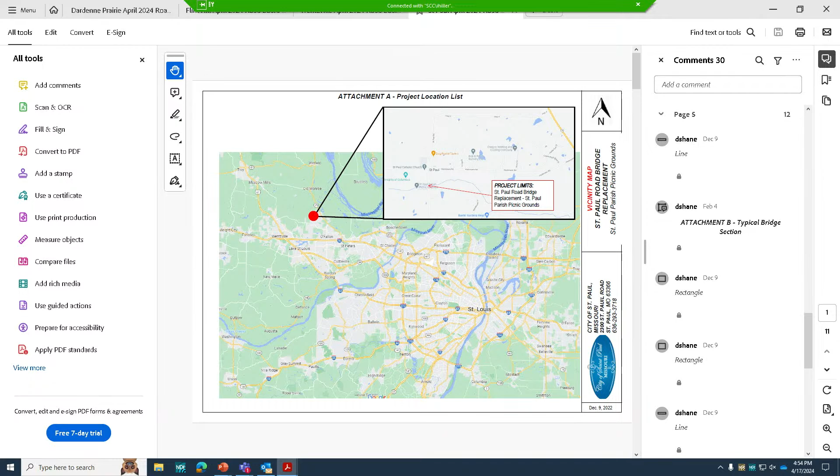I do have a couple handouts here, just general location and a more detailed location. Oh, okay, great, perfect, that's exactly what I have here. Okay, thank you very much.

So there's the general location. It's right by the St. Paul Church in St. Paul. Let me see here. Well, I don't have a map here of the actual more specific location, but it's about 900 feet south of Church Street, just south of the cemetery of St. Paul Cemetery there. So that's basically the location. It is the main access from the south into the main heart of the city.

So we anticipate having the road closed to speed up the construction costs. So there will be a relatively lengthy detour at some point once we get to construction.

The condition of the existing bridge - this is a bridge project, so the condition of the existing bridge is on MoDOT's deficient list. I think there's probably about 40 bridges on that list right now, and this is one of them. So we have the original bridge. The existing bridge was constructed in 1940. You'll see if you look at the MoDOT inspection report, it indicates that it was reconstructed in 2009. The reconstruction consisted of redoing the surface on the bridge, so where it's really deteriorating is underneath, the structure itself, not the driving path.

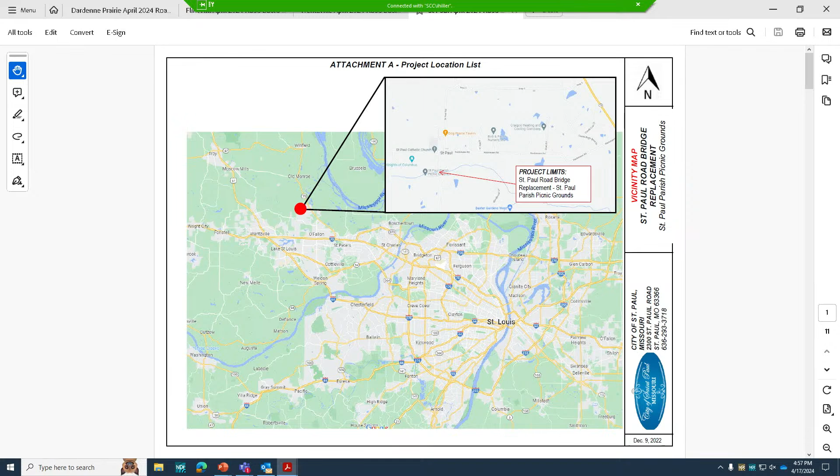The funding - we have secured funds that have been obligated by the federal government through MoDOT for roughly $827,100. We are requesting roughly $157,000 from the county and the city, which is the remaining portion since the funding we received through MoDOT is 80%. So the rest would fall between the county and the city. The county's portion we're requesting is $157,000, and the city's portion would be somewhere around $50,000.

So we have included contingency funds and inflation funds throughout the process from when we submitted to MoDOT originally. The structure itself will be generally the same size. We're looking at the possibility of doing an arch structure, depending on the cost, so that's one of the things we're going to look at in the preliminary phase.

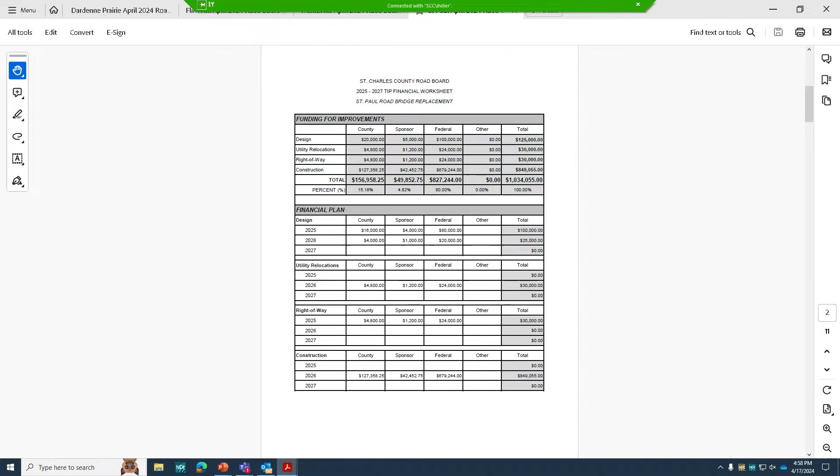We are currently under design. We anticipate that being completed at the end of this year and having a public meeting sometime this summer, and moving on with right-of-way next year. Construction would be scheduled in the following year, in 2026.

So there's the cost estimate. It's basically the funds that we have secured, like I mentioned, from the federal government. The total project cost is $1.034 million. Let me see what else I have here. Currently under design, and that is pretty much everything that I have, unless you have any questions regarding the project.